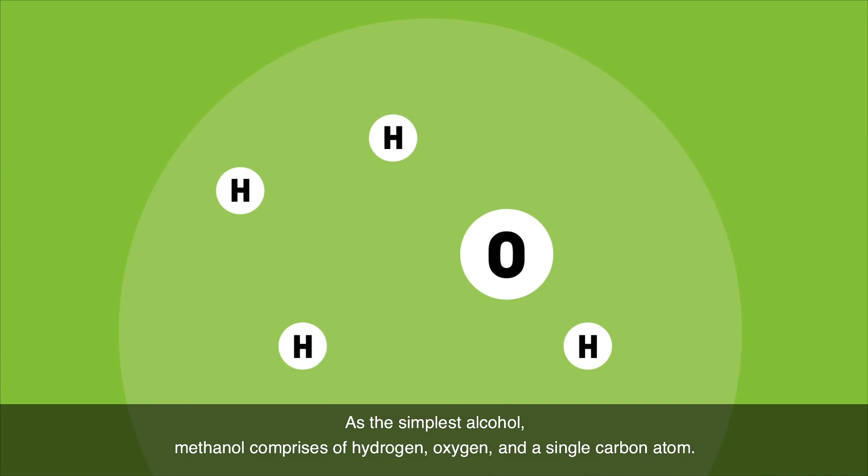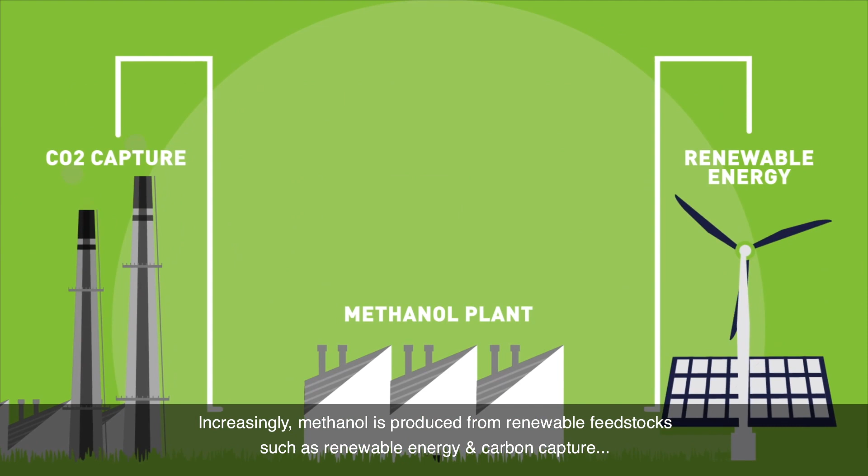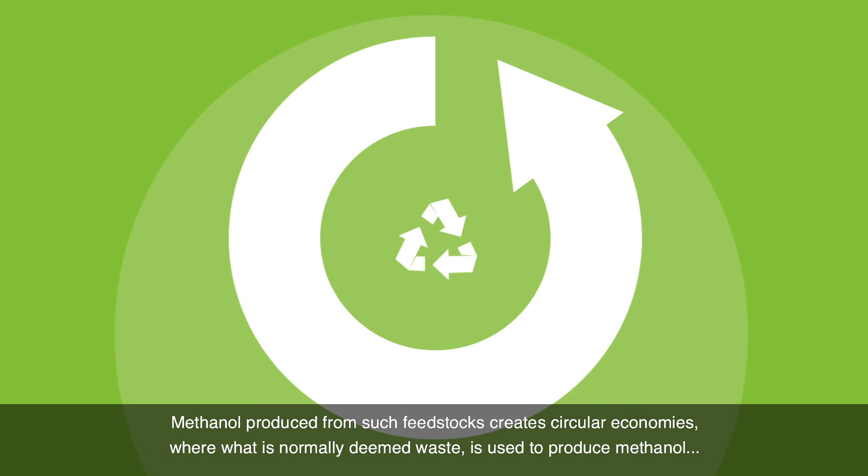In a fast-changing world, it is time to find innovative and efficient solutions to provide future-proof fuels. As the simplest alcohol, methanol comprises hydrogen, oxygen, and a single carbon atom. It has the highest hydrogen to carbon ratio of any liquid fuel. These chemical properties contribute to methanol's sustainability as a petrochemical feedstock and fuel. Methanol is commonly produced from natural gas. Increasingly, methanol is produced from renewable feedstocks such as renewable energy and carbon capture, municipal waste, and agricultural waste. Methanol produced from such feedstocks creates circular economies, where what is normally deemed waste is used to produce methanol, which is a useful and higher value product.

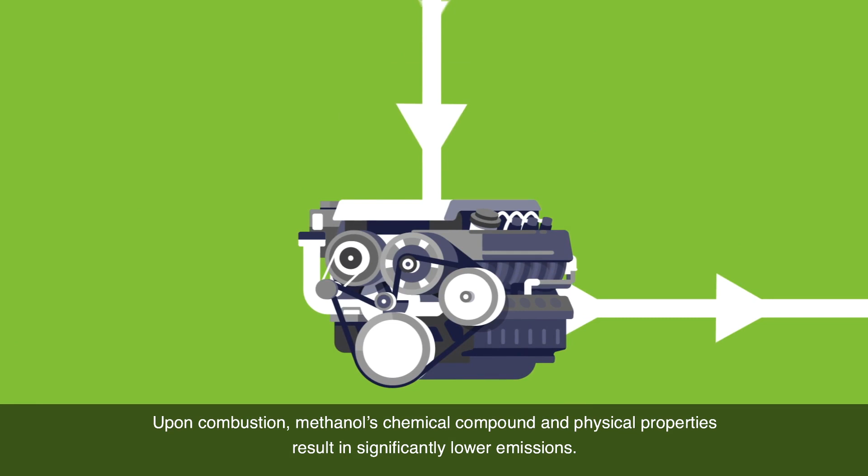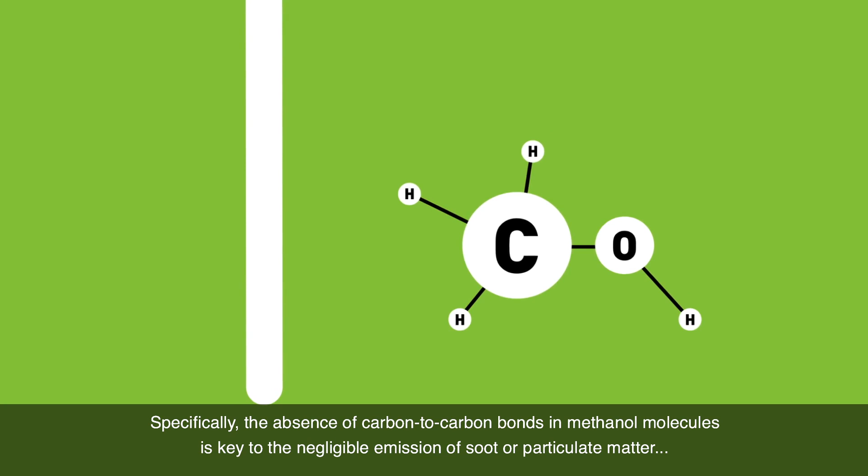Such processes effectively promote sustainability by creating value from waste and diversifying how waste is managed. Methanol is used to produce a wide range of ubiquitous products, such as materials for constructing houses, paints, plastics, car parts, and medical equipment such as personal protective equipment. When produced from renewable feedstocks, renewable methanol becomes a sustainable, net carbon neutral fuel, compliant with climate goals. Upon combustion, methanol's chemical compound and physical properties result in significantly lower emissions. Specifically, the absence of carbon-to-carbon bonds in methanol molecules is key to the negligible emission of soot or particulate matter, and the oxygen atom contributes to a fuller and cleaner combustion, making methanol an environment-friendly fuel that contributes to better air quality.

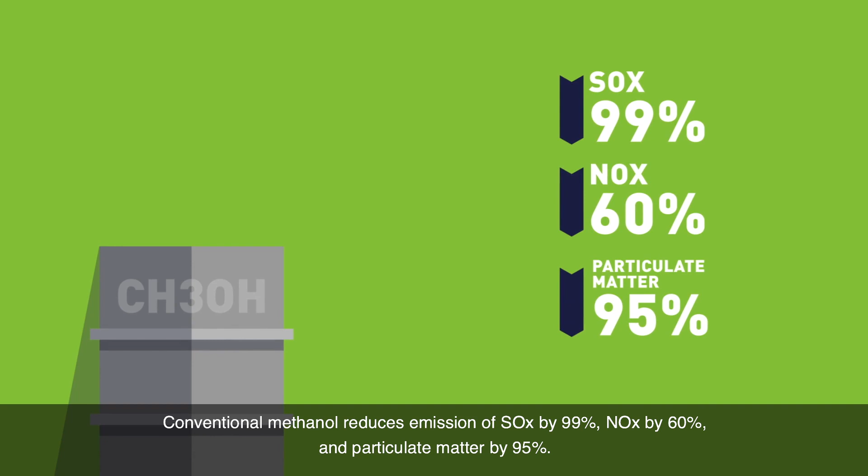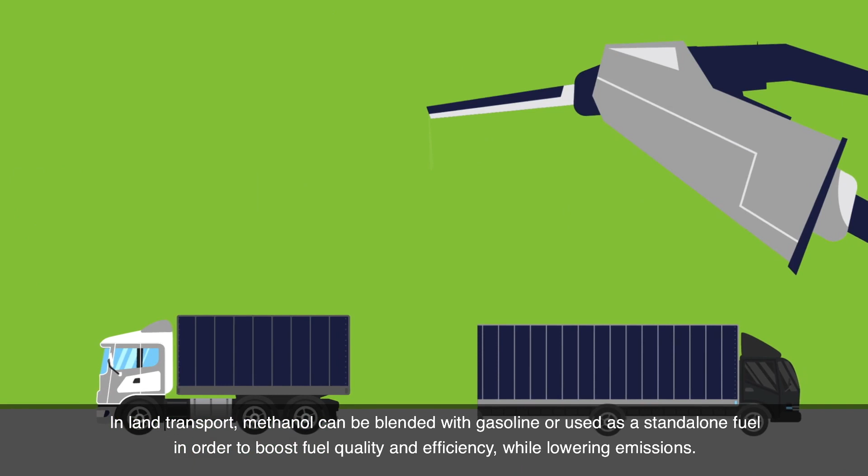As one of the most widely traded commodities in the world, methanol is available at more than 100 ports around the world, reducing infrastructure costs for the marine industry to transition to methanol. Conventional methanol reduces emission of sulfur oxides by 99%, nitrogen oxides by 60%, and particulate matter by 95%. Net carbon neutral renewable methanol will meet the International Maritime Organization's goal of reducing greenhouse gas emissions by 50% by 2050. In land transport, methanol can be blended with gasoline or used as a standalone fuel to boost fuel quality and efficiency while lowering emissions.

To improve air quality with a cost-efficient solution, China is fueling land transport vehicles with pure methanol. Iceland is fueling a fleet of cars with renewable methanol. Italy is blending A20, a blend of methanol, ethanol and gasoline. This blend is being demonstrated in a car-sharing fleet with plans for it to be made available to consumers. The United States uses methanol regularly in motorsports. Certain regions in China, India, Nigeria and Tanzania have adopted methanol as an alternative fuel for cook stoves. Methanol's clean burning properties improve indoor air quality, lowering the risk of respiratory diseases.

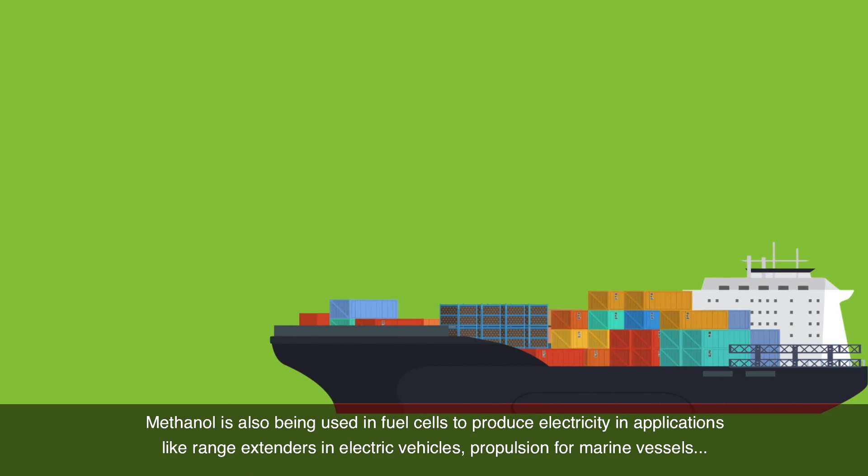Methanol is also being used in fuel cells to produce electricity in applications like range extenders in electric vehicles, propulsion for marine vessels, unmanned aerial vehicles, telecommunication towers, and military equipment. As a liquid at room temperature and pressure, methanol is a convenient hydrogen carrier for fuel cells.

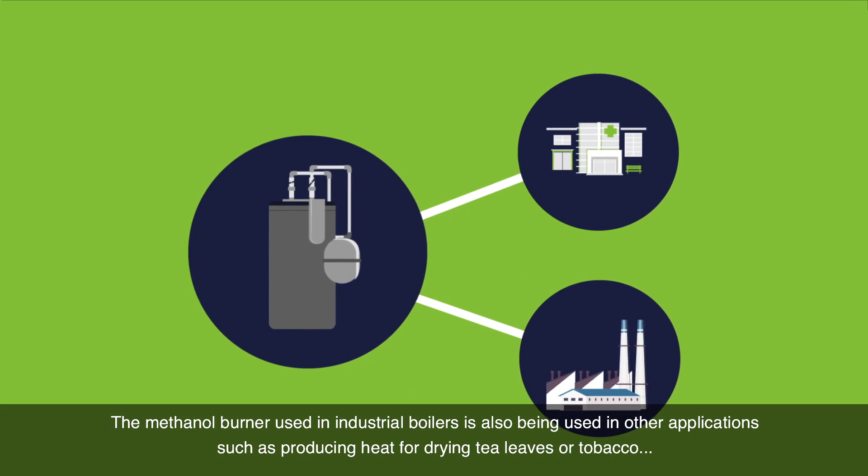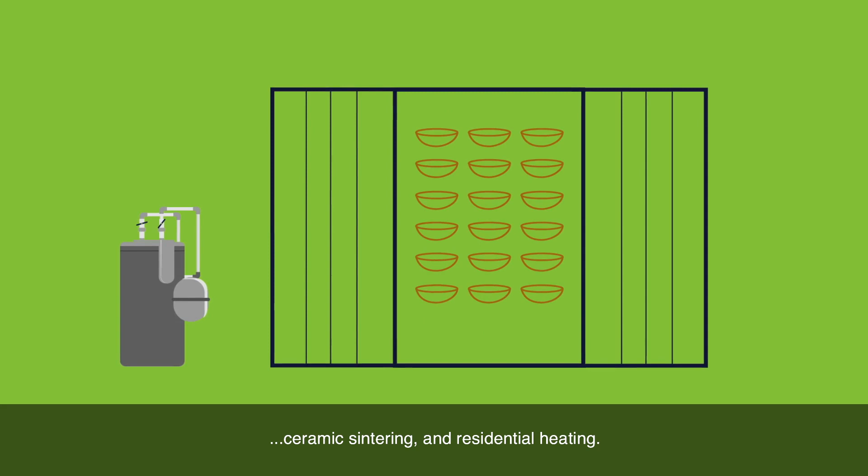Increasingly, methanol is being used as a fuel in industrial boilers to produce heat or steam for the pharmaceutical and manufacturing industries. The methanol burner used in industrial boilers is also being used in other applications, such as producing heat for drying tea leaves or tobacco, ceramic sintering, and residential heating.

As you can see, there are no shortages of available applications for methanol as a clean and net carbon-neutral fuel. Methanol is the key to a more energy-efficient and clean future.

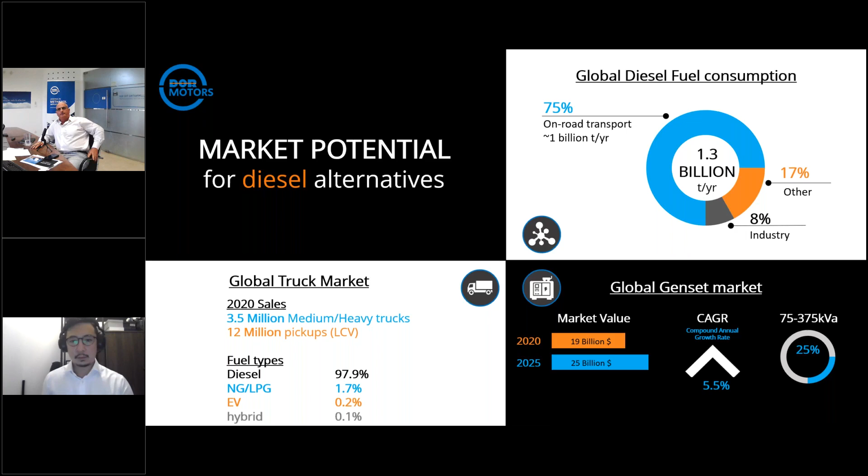And still, as far as methanol, we do have to realize that there are some challenges to look into in order to make methanol an acceptable fuel. One of which has to do with the machinery, with the engine, and the other aspect is the chemistry. We call it DOR-Mix. This is to say both the additives that we have to add to the methanol, as well as additives we have to add to the engine, like the special lubricants. And these I will now talk about.

So let's start with the generators. As I mentioned, it's a $20 billion market. And what we've done is we've been able to manufacture generators of both medium and small size, as well as large size generators that replace 100% diesel with 100% methanol. First and foremost, the emissions have been significantly reduced. As we all know, methanol, when it is burned, and especially when it is burned at the right properties, there are no particles, and this is very significant, a significant reduction in NOx, SOx, as well as CO2.

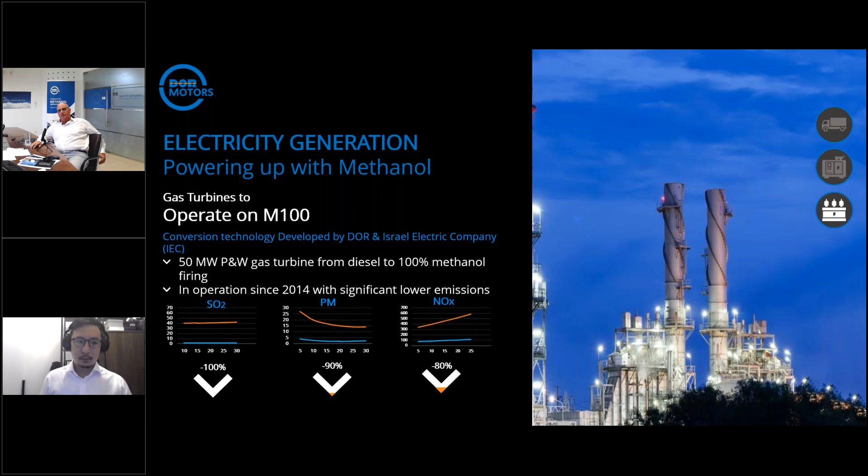We don't need the SCR system in order to comply with Euro 6. The SCR is what we normally use, the urea solution, which is added to trucks in order to reduce emissions. When running on methanol, it is not necessary, and yet we comply with the Euro 6 emissions standard without the SCR, which is very costly, both when buying and when running. So it's really a significant improvement.

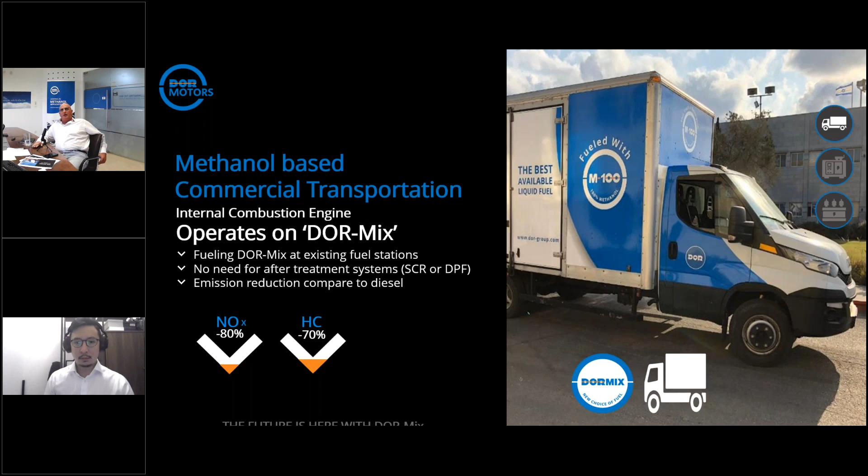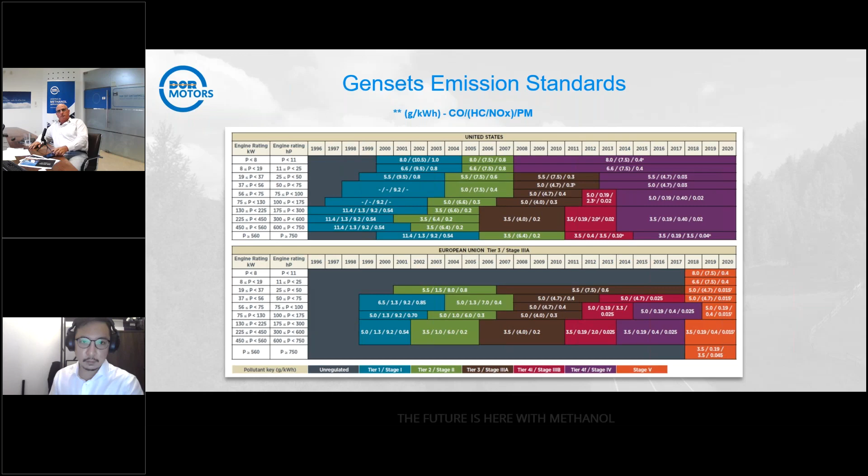So to sum up, these are the overall reductions in emissions for methanol as compared to diesel. When adding some of the additives, we can get even improved reductions of emissions. But again, the most significant point is that this is done at a relatively very low cost using existing infrastructure, whether it's internal combustion engine, a gas turbine, as well as the storage and distribution infrastructure.

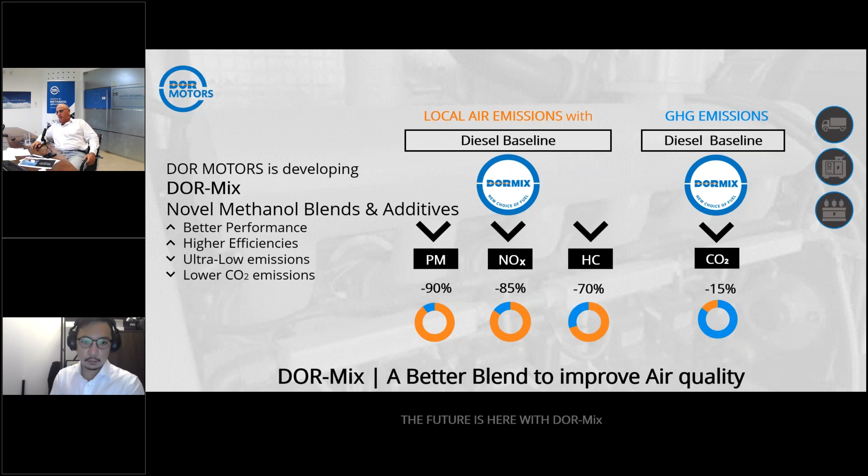So what are the challenges we are facing? We do need to do some modifications to the internal combustion engine. There is the issue of material compatibility throughout the chain. Methanol does have its own properties, and we do need to understand the chemistry in order to overcome corrosion and wear.

There are issues of health and safety. I mean, when methanol is burned, it burns almost in a way that you cannot see it. So there are precaution issues that we have to take care of. And obviously, we have to provide the methanol supply chain and make sure that it's there. Otherwise, no one will be interested in using it.

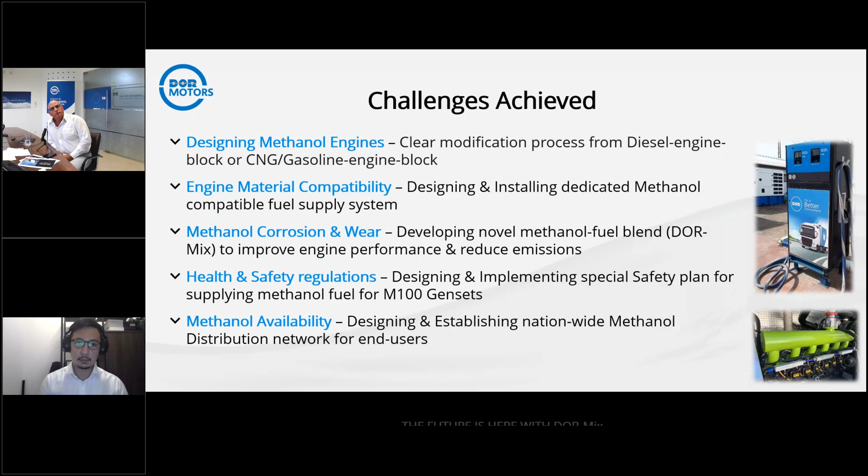I would like to take just a few slides to mention the work we've done with Fiat Chrysler as far as fuel blending, 15% methanol in gasoline, where actually here the major advantage was that there wasn't any significant change we had to make in the overall sedan in order to utilize M15.

And here you can see the emission difference, reduction of emission as compared to RON 95 gasoline. And you can see a very significant reduction in emissions when blending 15% methanol into gasoline. And again, at the end of the day, we achieve this with no additional cost to consumers.

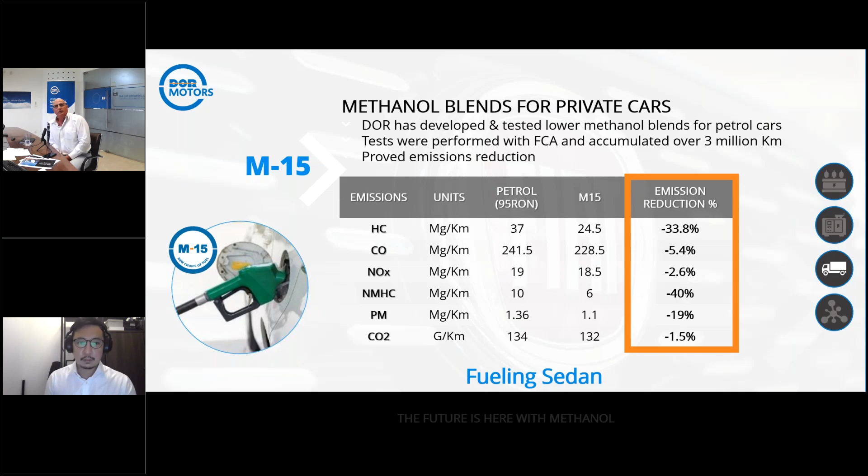So what is our market potential? First of all, for generators, the electric vehicle revolution will require much more electricity, and we do get a lot of demand for gensets running on methanol in order to charge electric vehicles, especially buses in the cities. So this is a new application, and we are welcoming it.

I would say that altogether, the main advantage for methanol will be in those markets where methanol is being produced. That's where the delta between marketing the methanol locally for energy is much more beneficial as compared to exporting it, as well as all those markets which practically in one way or another are placing duties or levies on diesel, and this makes diesel more and more expensive, which implies that methanol will become much more competitive, whether it's methanol produced from natural gas or methanol that is and will be produced from alternative fuels and will become part of the overall idea and notion of recycling our energy and our resources.

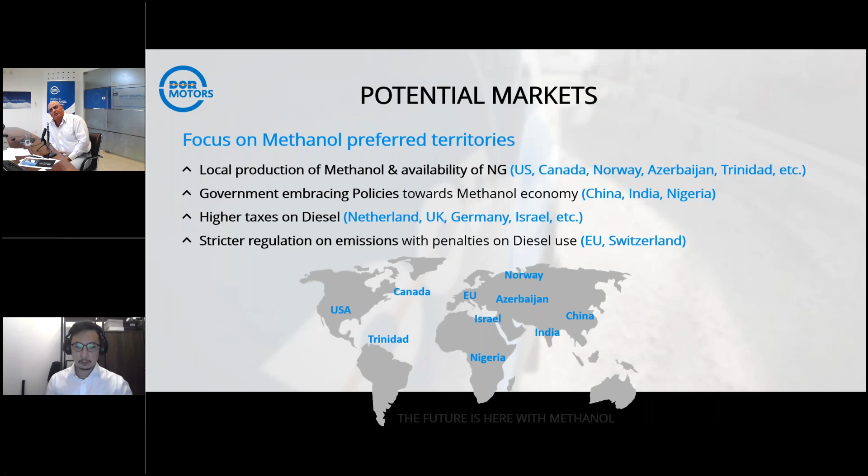So I thank you very much for the opportunity, and I invite you to become part of this exciting revolution. Thank you.

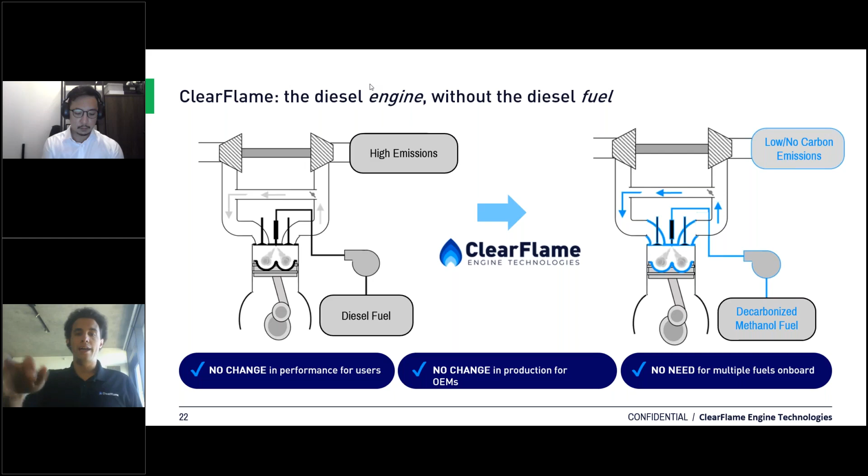We have run both ethanol and methanol in the past, by the way. We've been able to demonstrate that we can hit all of those operating points without the need for any diesel fuel, using the stock methanol that is already out there and available, whether it's mixed with gasoline, mixed with water, or any other potential impurities. We've proven the technology on the Cummins engine platform, and we are putting it into trucks on the road in the fourth quarter of this year.

So what this technology enables in terms of its value proposition pillars are really three core attributes critical for cost effectively mitigating emissions from the heavy duty sector. First and foremost, this has to be a low cost solution. Total cost of ownership has to pencil, which means you can't require a lot of upfront capital, either on the equipment or the infrastructure, and you can't increase operating costs with higher fuel costs.

Similarly, we need solutions that are fast to implement. There's a lot of work being done on solutions that might be relevant in the 2040 to 2050 timeframe. But if we're serious about hitting our emissions goals, we need alternatives that are ready to go now. And to be clear, this can be compliant with any emissions reduction norm, as Gil was just mentioning, Euro 6 transitioning into Euro 7, what's happening here in the United States or in California at CARB, and at the international level in terms of carbon mitigation regulations.

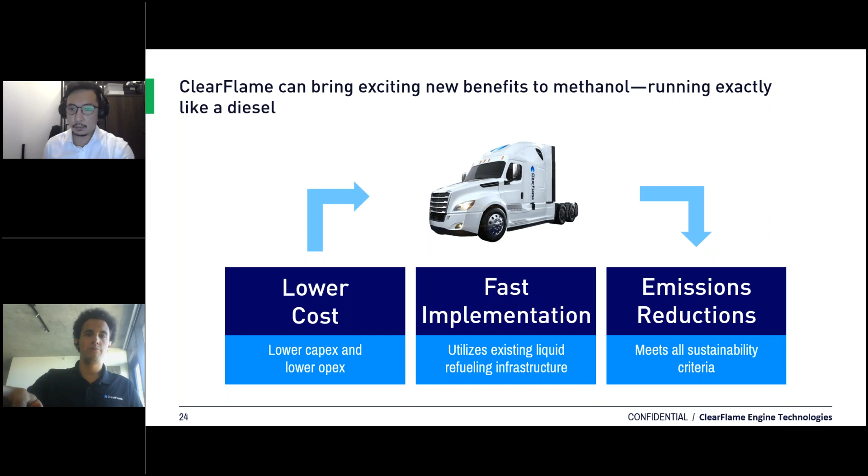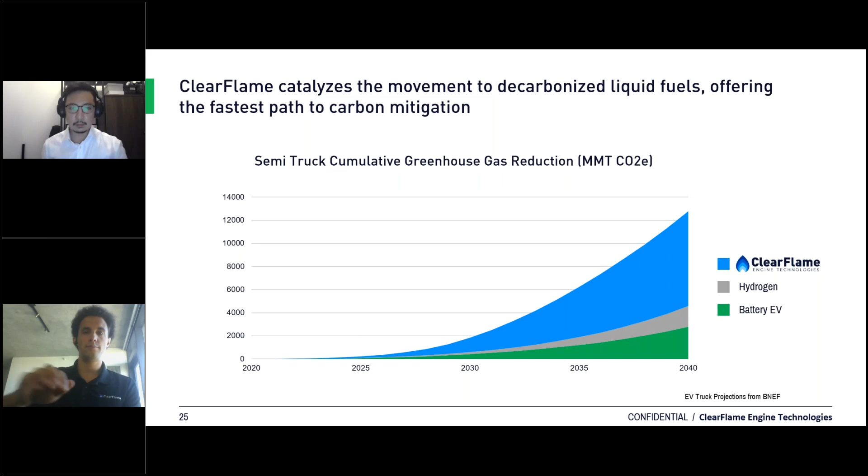And circling back to the economic case, again, while we are focused on emissions reduction and sustainability, solutions do not get adopted in these commercial sectors, the ones that are most reliant on diesel engines, unless they save operators money. Margins are very thin and people simply cannot pay extra to go green. This is really one of ClearFlame's biggest advantages. By not adding any complexity to the truck itself, while also using low cost and readily available fuels, we can offer a lower total cost of ownership, meaning there is no longer a green premium to reduce the emissions of your operation.

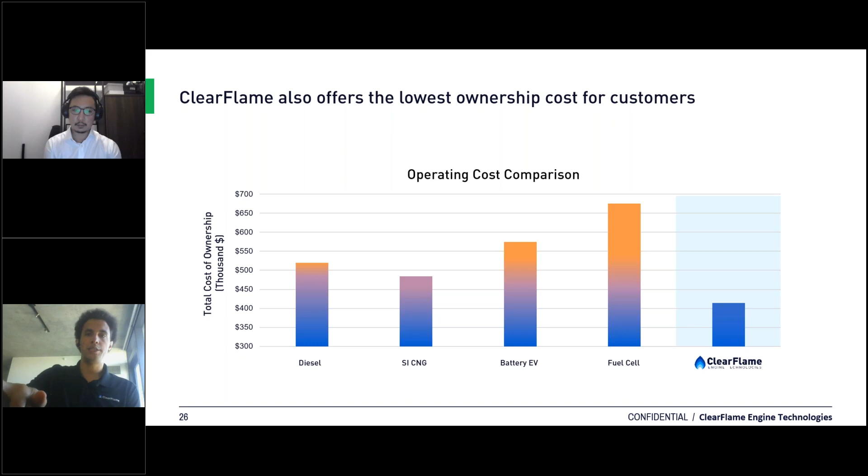This, of course, is critical for accelerating adoption of drivetrains in cities that can improve air quality. So a lot of the focus in the world today and in the presentation so far has been on carbon, but knowing that we can improve soot, SOx, NOx, and all the other human health concerns associated with diesel is a major benefit that can't be overlooked.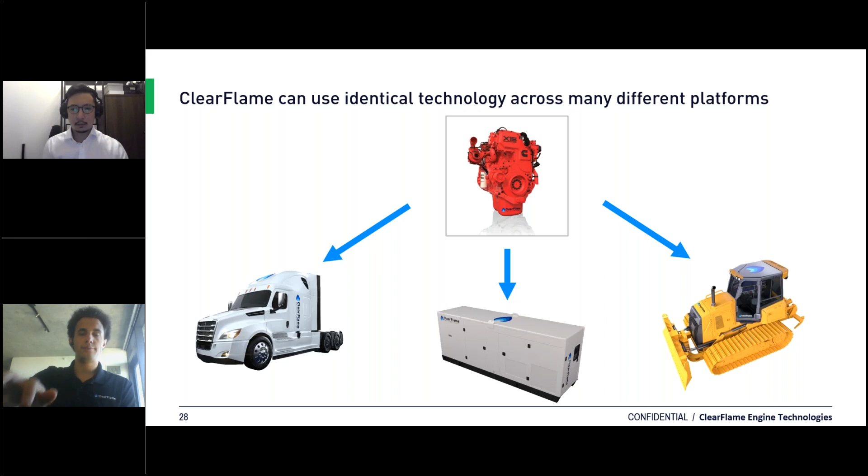Now, I've talked about this technology mostly in the context of trucks, but I do want to indicate that this is capable of being used anywhere a diesel engine is used today, which includes not just trucks, but off-road equipment like construction and agriculture, and solutions like diesel generators. This, of course, is a massive market opportunity, both in terms of the commercial revenue that we can get from product sales, but also major new markets for fuels like methanol, as they all seek to displace diesel fuel in parallel.

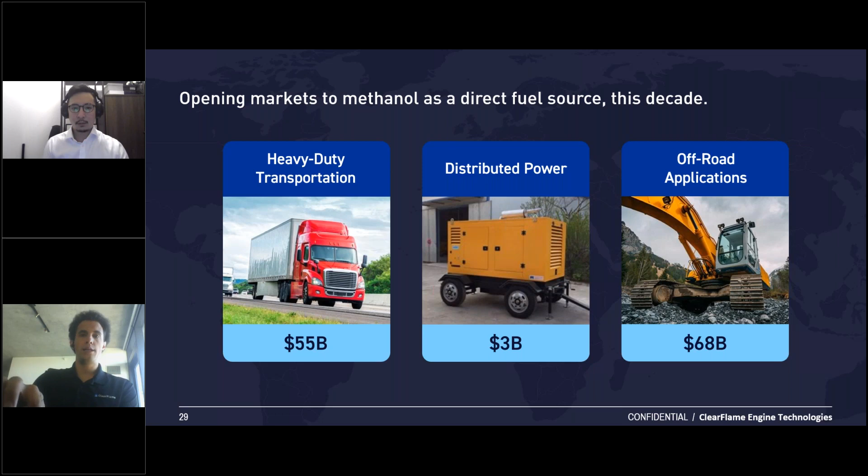So, with the kind of concluding remarks today, I want to share a few thoughts of how I think ClearFlame has a chance to collaborate with the methanol ecosystem going forward. As I mentioned, we're going to be putting our first 2 trucks on the road in Q4 of this year, and we have partners lined up here in the United States to test those trucks, in this case using ethanol fuel, because in the United States, that's where we've lined up our fuel partners. We would love to be able to expand this into international opportunities or domestic opportunities where using methanol might be the preferred alternative to ethanol.

These trucks are ready to go. We just need the fuel partner and the fleet that's ready to test them on another fuel besides just the ethanol alcohol.

Also, we have a demonstration planned in 2022 in a microgrid. One of the things that has been of great interest here in the United States of late is grid resiliency. What happens as we get lots of wind and lots of solar, and there becomes fluctuation in the electrical supply that's available on the grid? Well, historically, those demand fluctuations have been met by things like diesel generators or natural gas peaker plants. Using a technology like ClearFlame's, you can operate at very high efficiency and provide on-demand power, but without the emissions and cost challenges of diesel fuel by using that lower cost alcohol. Again, this is currently a US demonstration planned with ethanol, but we would love to get a parallel demonstration on methanol going as well.

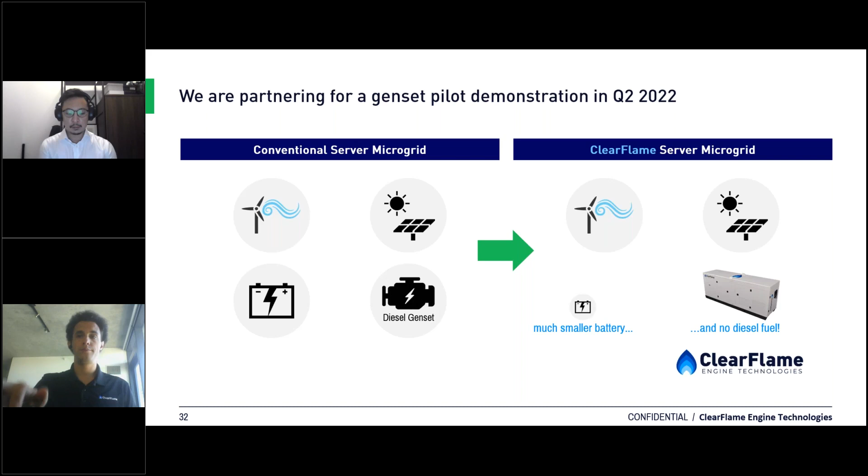I should point out this isn't just about new engines and equipment. There are millions of diesel engines on the road and in fields that will persist for decades. A fundamentally retrofittable solution like ClearFlame's is important, not just to slow the expansion of diesel going forward, but to address those existing assets that will remain big polluters unless we find a retrofit alternative.

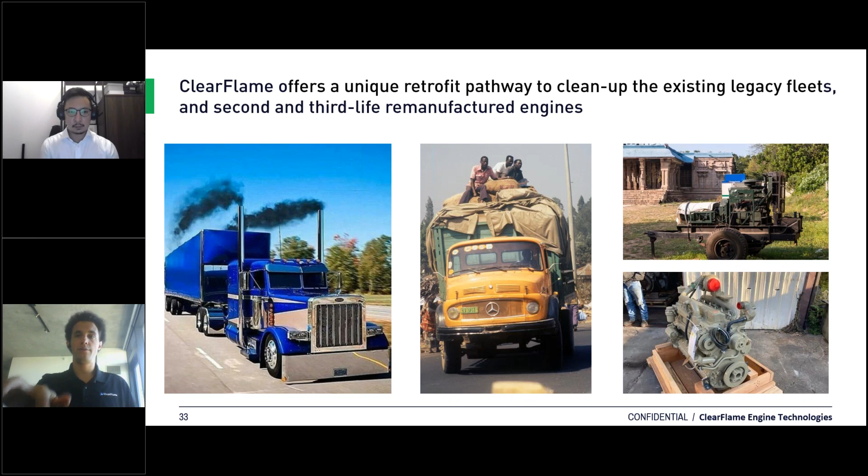My final point on methanol infrastructure today is some messaging that can help in the United States and Europe as well, which is the potential for methanol to be a hydrogen carrier and expand energy access. Right now there's need for hydrogen infrastructure, but no demand for hydrogen fuel because we don't have fuel cell vehicles yet.

We can build methanol stations today that are low cost using liquids, and those stations are viable because they can deploy fuel right away into technologies like Dor's and ClearFlame's. But at the same time, that distributed methanol can be reformed to hydrogen, meaning in the future we can have dual fuel stations providing both hydrogen and methanol to the market.

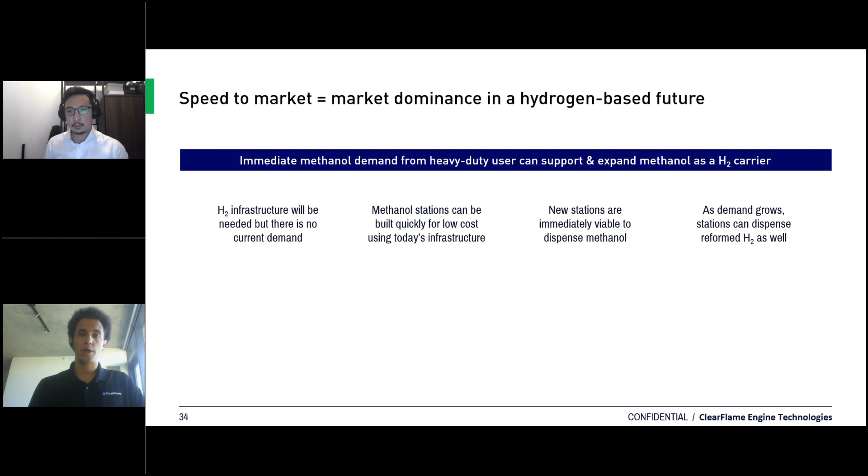This isn't to say hydrogen or methanol, one is better than the other, but I think the more we can show these solutions working together in a way that can have immediate impact, that's a great way to get the policy support we need to expand into the market.

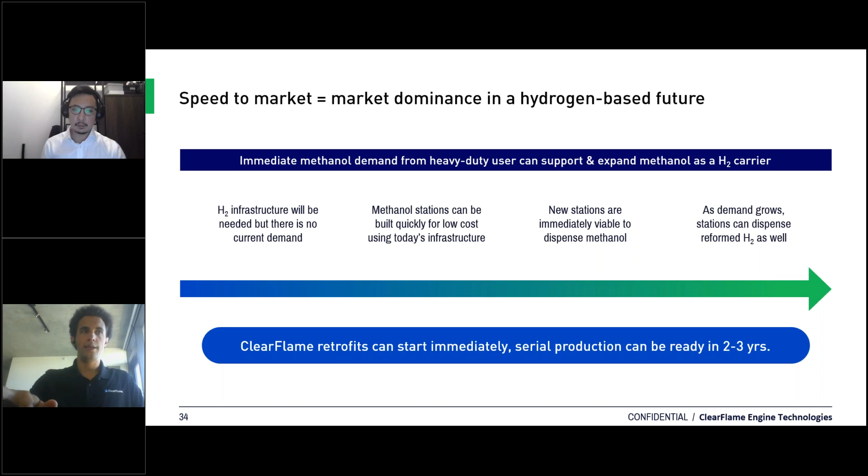Wrapping up, at ClearFlame our vision is to provide an easy to adopt, fast to market solution that can enable rapid carbon mitigation without sacrificing any heavy duty performance. And we can do that without a lot of infrastructure development, without decarbonization of our electrical grid, and perhaps most importantly, not requiring users to change the way they're getting their jobs done today.

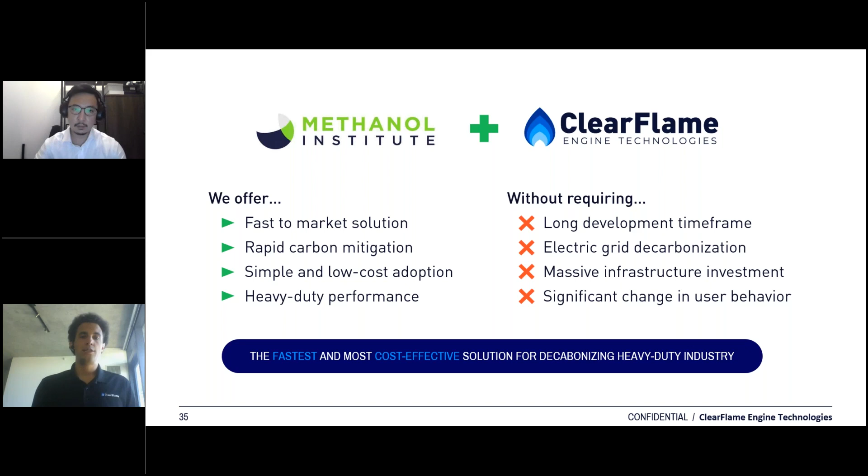So thank you very much for your time. I look forward to taking any questions at the end of the presentation and exploring how ClearFlame can work with the methanol sector to prove there's a faster and more cost-effective way to decarbonize heavy-duty industry.

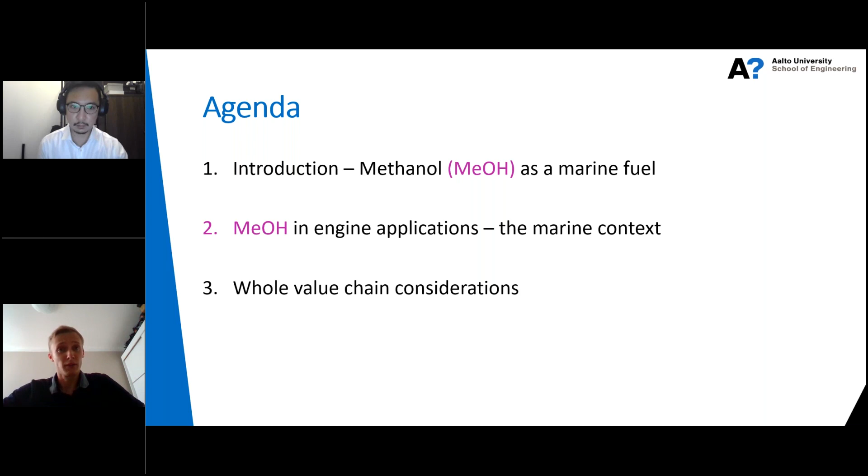I will focus on this end-use application, but also give you some highlights regarding our other activities related to the whole value chain considerations of methanol. The former speakers just introduced methanol pretty well and highlighted the benefits, so I think it's clear that methanol is a very promising option.

But I would like to start with this figure where we have a pyramid representing the challenge of decarbonization of transport. If we go to the bottom of this pyramid, we see that readiness of electrification is pretty high, especially for light-duty vehicles or rail. But if we go to the higher levels, other sectors, we highly need liquid or liquefied fuels.

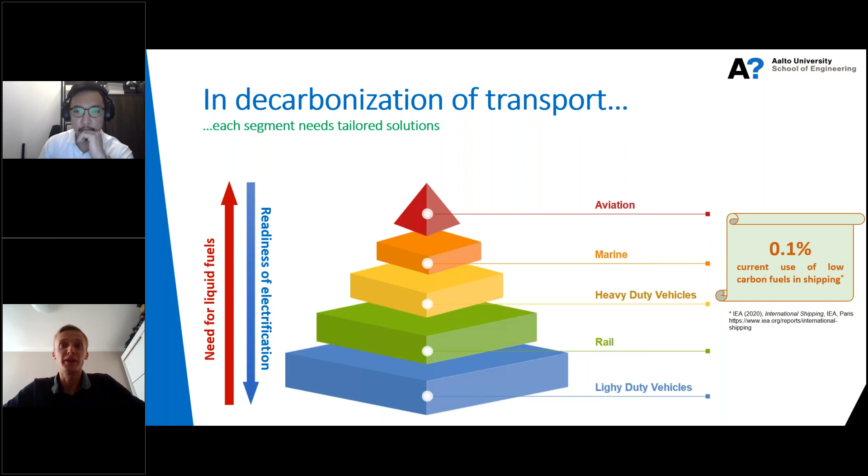Focusing on the marine sector, at the moment there is huge room for activities in decarbonization. Currently we have only 0.1% of low carbon fuels, so that's a very big room for greening solutions.

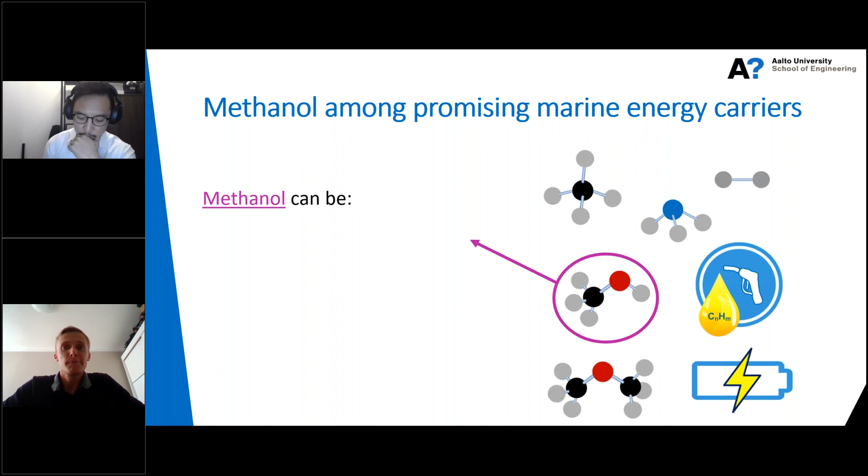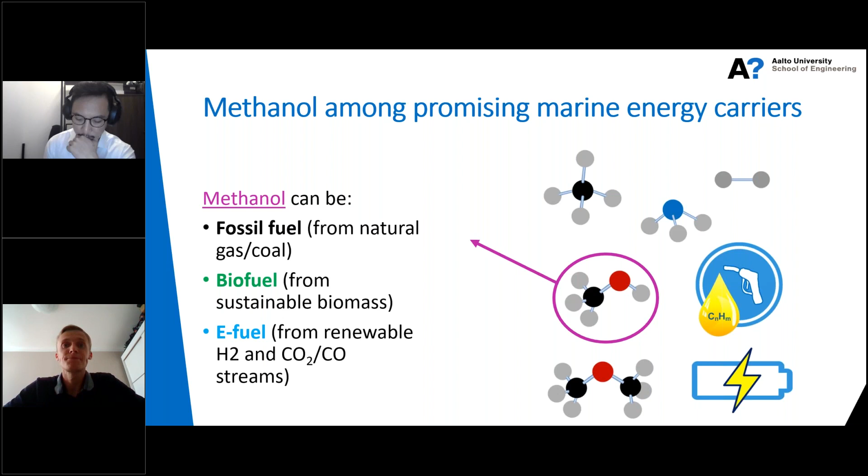For shipping, we have a few options, like liquid biofuels, then electrofuels, then maybe some forms of hybridization. But from this perspective, we picked methanol as one of the most promising options for marine transport. Of course, methanol at the moment can be fossil-based—almost all production comes from natural gas or coal. But in the future, we could expect growing importance of biofuels and electrofuels, so in that way we can also produce methanol. That's the huge merit of methanol.

Here I listed the most important advantages of methanol. Of course, the liquid state at ambient conditions is important from a storage perspective for shipping, and we have already partly ready infrastructure in big harbors. Apart from that, methanol is miscible with water and biodegradable, and far less toxic than heavy fuel oil, for instance.

Of course, as with all new technologies, we have some challenges to be properly addressed. One is related to the energy density of methanol, but it can be overcome, for example with bigger onboard tanks, maybe some additional safety measures on board, and of course cost. That should be properly addressed in the future.

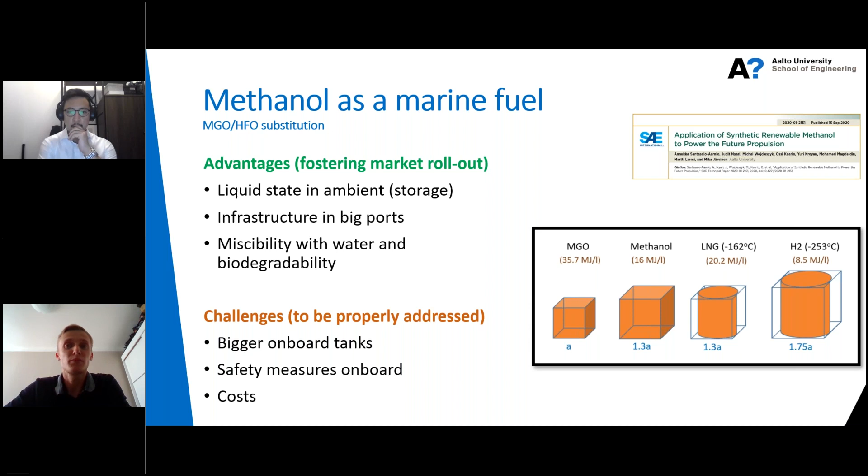Now let me move to the core part of this presentation, methanol combustion in compression ignition engines. For shipping purposes, due to the very high efficiency of compression ignition engines, we can try to use methanol in two different concepts. One is direct injection of methanol.

Here we can have ignition improvers blended with methanol, or direct injection of methanol and then pilot diesel injection. The second concept is port fuel injection, where we have conventional dual fuel combustion or reactivity controlled compression ignition combustion.

How are those concepts represented in the market? There are already some commercially proven technologies. In the marine sector, we could see, for example, the Wärtsilä direct injection system in a 4-stroke medium-speed engine, successfully demonstrated. Then we have 2-stroke low-speed engines from MAN, also with direct injection. And for the port fuel injection concept, we have diesel direct injection combined with port fuel injection of methanol.

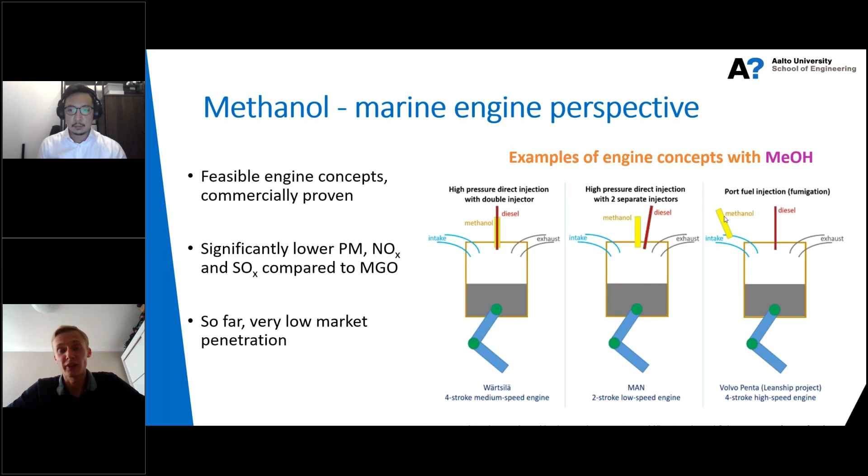And how can we, as a research institution, support these activities? We are trying to lead experiments and understand the physics inside the combustion chamber.

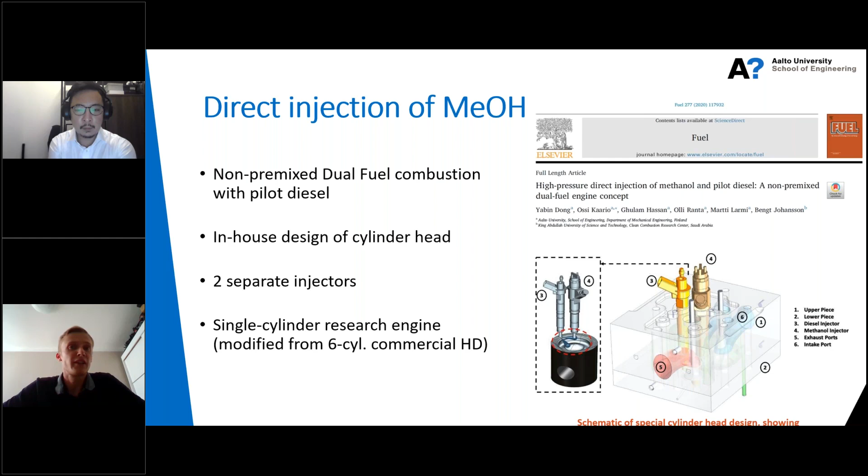Here is one example we tried with direct injection, the first concept I introduced: direct injection of methanol with non-premixed dual fuel combustion. What's interesting is that in our group we designed our own cylinder head with two separate injectors, using a modified single-cylinder research engine in our lab.

The key results from this experiment: we reached 44% thermal efficiency. It turned out that methanol, as a main fuel at high loads, can lead to stable combustion and robust ignition characteristics, increased thermal efficiency, and lower local emissions like unburned hydrocarbons and carbon monoxide. Those results are already available, so you could check the references.

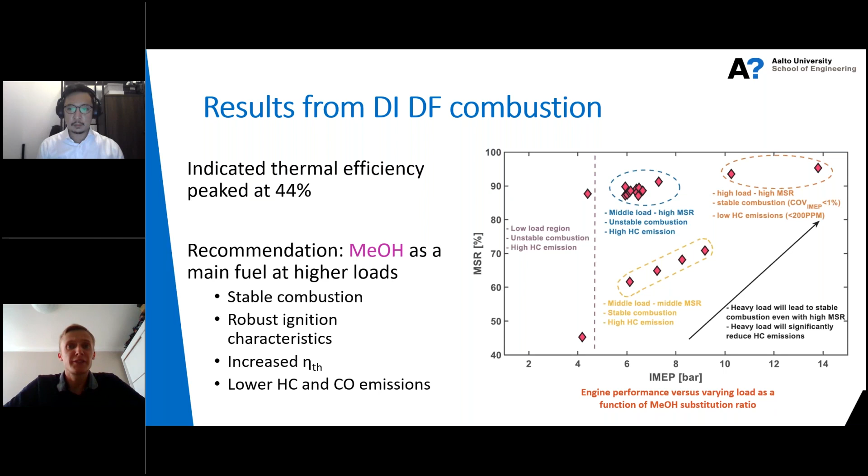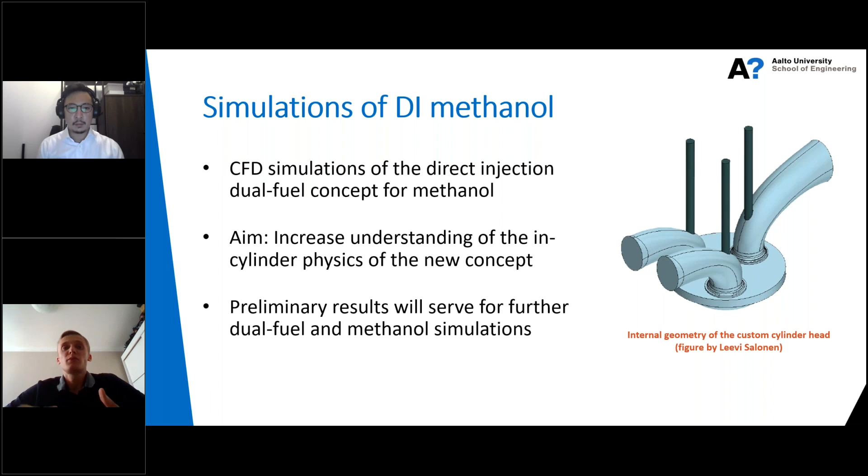Currently, these experiments are followed by simulations. We are trying to understand the physics inside the cylinder for this new concept, and the results we are obtaining will serve for further dual fuel and methanol simulations.

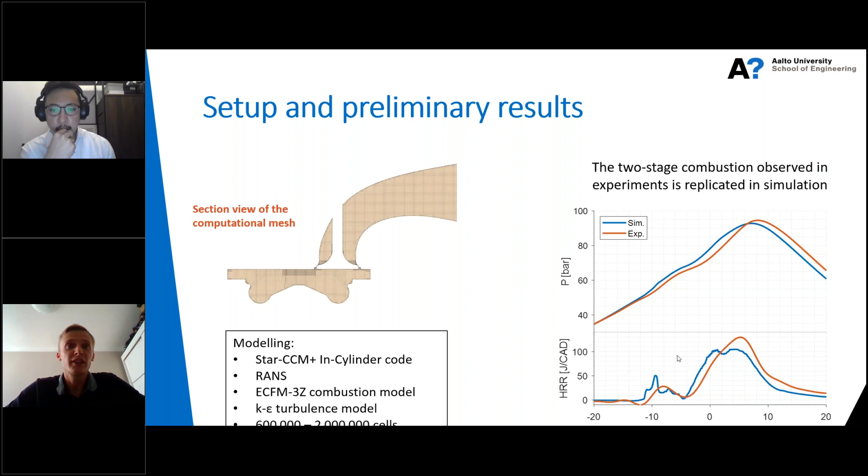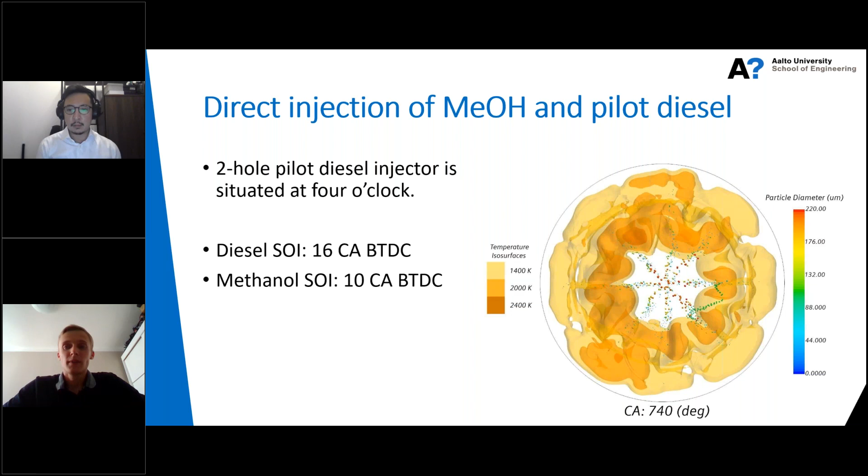So the previous slides were related to direct injection. Now I will say a few words about methanol port fuel injection. It's a more conventional dual fuel concept, but we have done one innovation here with negative valve overlap.

Some portion of the exhaust gases are trapped inside the cylinder, functioning as internal EGR, or internal exhaust gas recirculation. The results are not published yet but are very promising. We obtained pretty stable combustion with quite high thermal efficiency and pretty low emissions, with very high methanol substitution, meaning how much diesel is substituted by methanol.

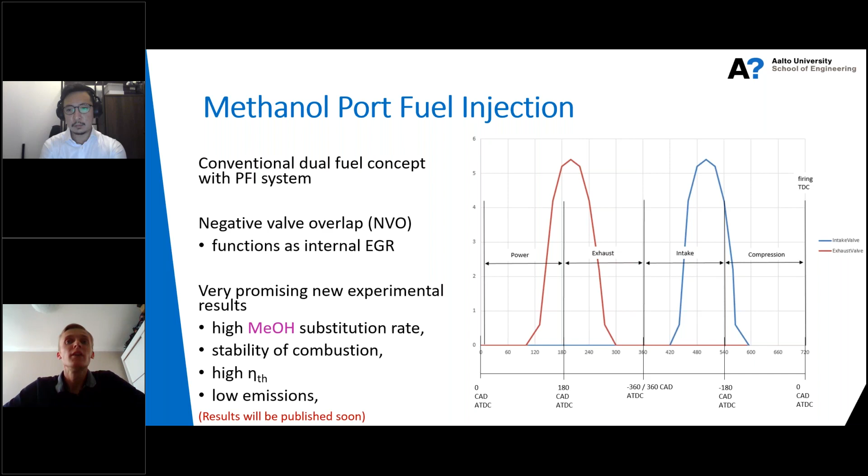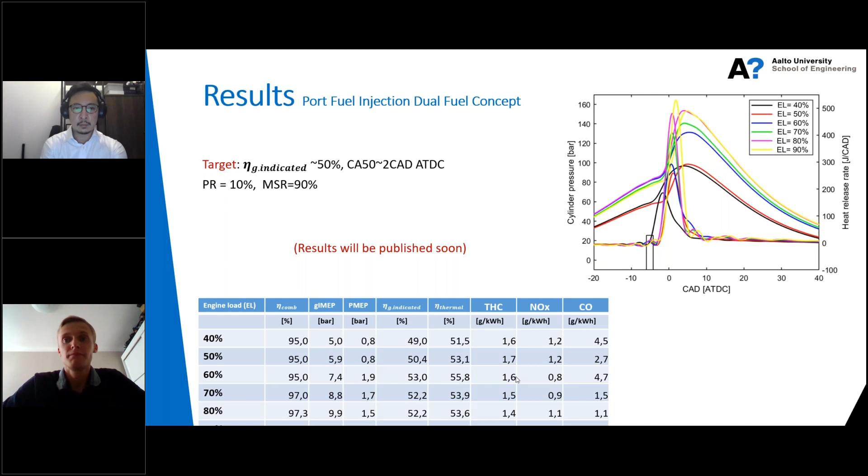Now a few words about more fundamental studies. As you might know, the spray is a very critical parameter for compression ignition engines, affecting engine efficiency. We were also studying, two years ago, how methanol spray behaves in the combustion chamber.

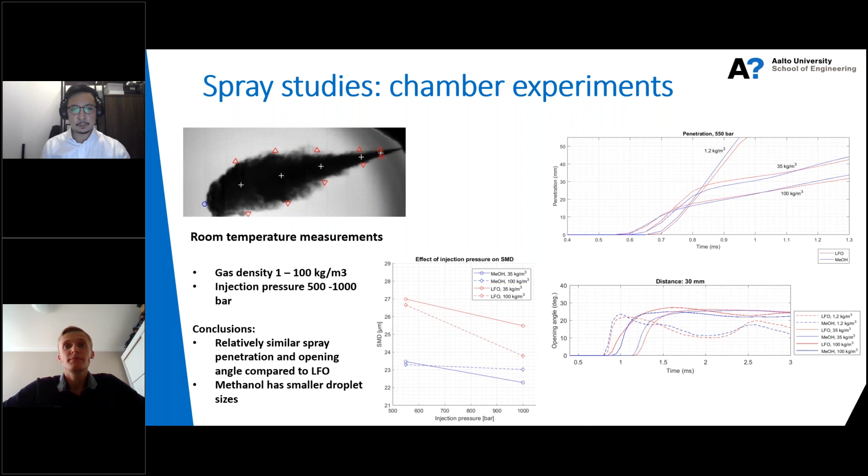Those experimental studies were accompanied by simulations, including large eddy simulations to understand the fuel spray mixing and evaporation. Those simulations were pretty in line with experiments, so there were no big differences between light fuel oil and methanol fuel. But of course, the lower temperature within the spray was caused by the higher heat of vaporization for methanol.

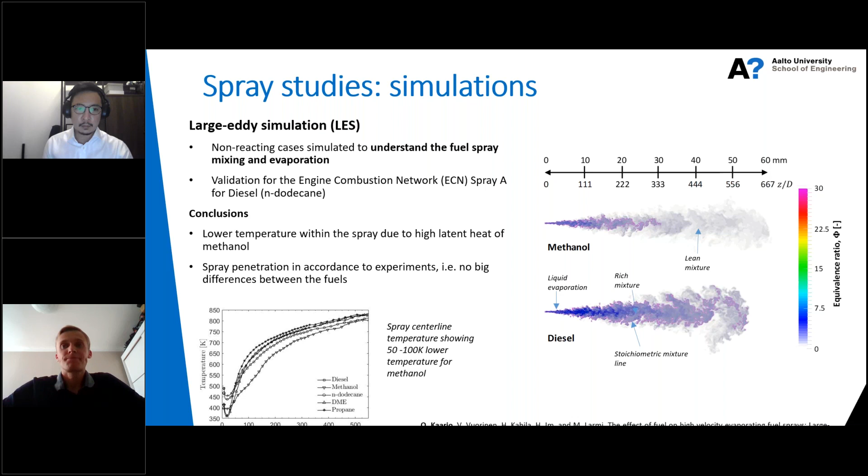At the end of my presentation, I'd like to give you some highlights regarding the whole value chain assessment. In our research group of energy conversion, headed by Professor Martti Larmi, we covered the whole value chain related to energy carriers, starting from conversion, then energy use and recovery. One important aspect when we speak about methanol as diesel substitution is where we will have our renewable methanol from.

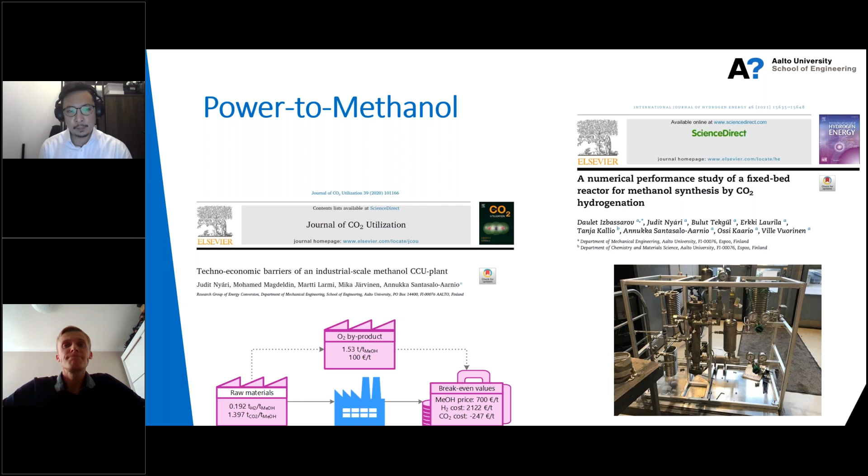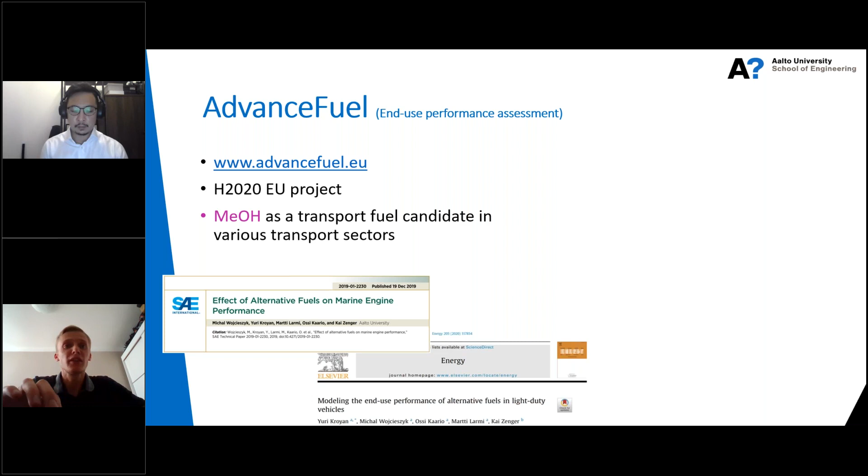Then going to the end-use performance assessment, we contributed to the Horizon project funded by the EU Commission. You can find more information on the website. Methanol was identified as one of the most promising transport fuel candidates. And in the AdvanceFuel project, we created a tool which can assess different fuel options from the end-use perspective, including methanol.

Finally, as we have both production and end use, we also need legislation in place and an appropriate environment to support the market uptake of methanol. In the AdvanceFuel project, we have good collaboration with other partners related to all value chain parts, where we identified the most significant policy gaps and what interventions are needed. Upcoming work will identify methanol as a key fuel for hard-to-abate sectors, especially maritime.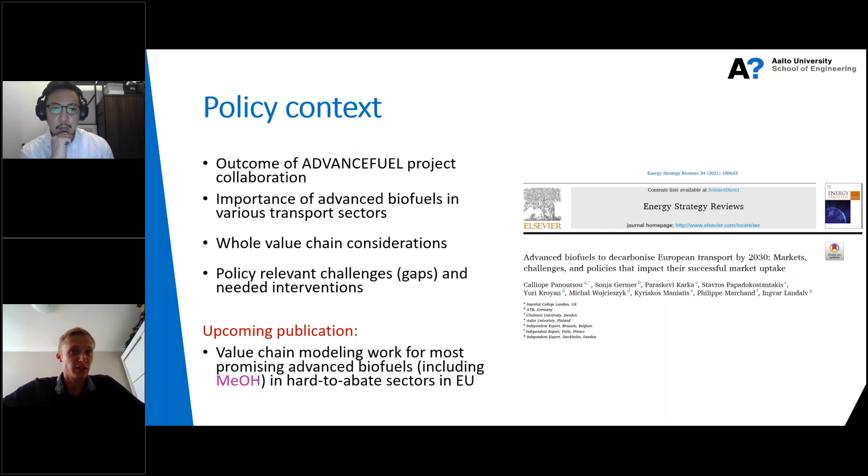At the end, I would like to acknowledge the support and contribution to this presentation from my colleagues, Professor Martti Larmi, Ossi Kaario, Zeeshan Ahmad, and Leevi Salonen, and the whole research group of energy conversion.

So with that, I would like to conclude and thank you for this opportunity.

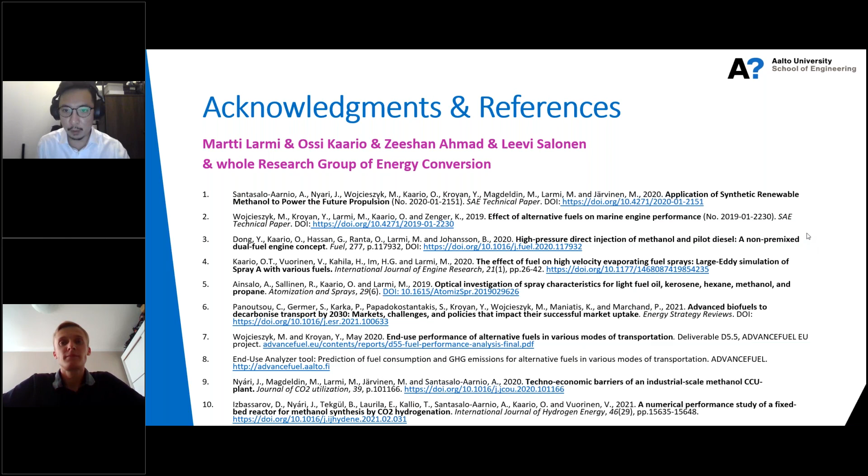Jan, let me see if I can pass controls to you. And you can start when you're ready.

Hi, hello everybody. My name is Jan from FuelSafe. I'm today replacing Mark, our COO, sorry, I'm the COO. As we had very interesting scientific input before, thanks for the many details and interesting aspects about methanol itself, I will keep concentrating on the aspects of our technology, what we are doing, what we are achieving in reality, and skip a little bit on the methanol benefits, because those have been clearly described before, even better than I could do.

FuelSafe is a German green technology startup, and we developed a hardware retrofit system to reduce emissions and operating costs on existing large engines. There's a gap between smaller engines like truck engines that can be more easily retrofitted to methanol standard. It's way more complex due to the methanol energy content to do this on ships, for example, or on larger power plants. So we developed a hardware retrofit that is already being installed today, actively helping today to make fossil fuel diesel engines cleaner and more efficient.

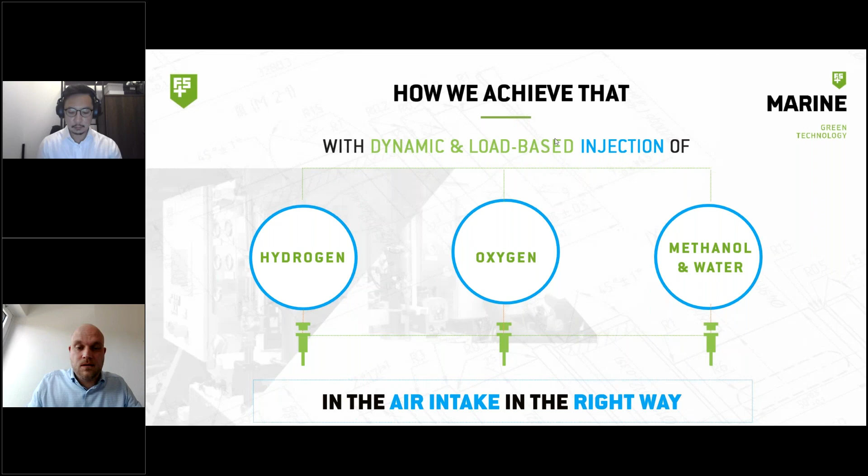So what we do, we use methanol not as a fuel replacement, but as an additive, meaning we inject about 3 to 5% of the original fuel volume as methanol into the air intake of the engine. We're injecting the methanol together with water and a separate hydrogen and oxygen gas mix, our so-called synth gas. We inject those 4 additives into the intake of the engine, and by that we achieve several very positive aspects.

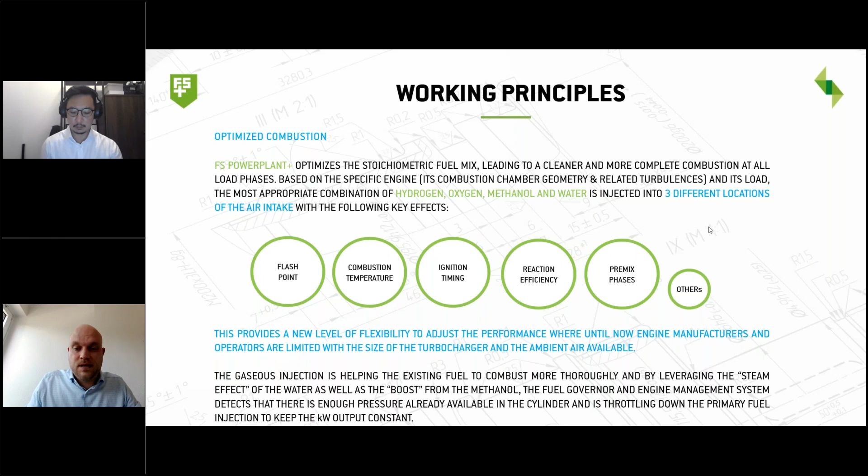Those have already been described technically by the presenters before. What we can influence with these mixtures is the flash point, combustion temperature, ignition timing, reaction efficiency, the premix phase, and other aspects. In total, we inject the right amounts of additives at the right time according to the engine load into the air intake, cooling down the intake temperature and helping the ignition process, especially in combustion, to become more comprehensive and efficient.

So I will skip those technical installation details.

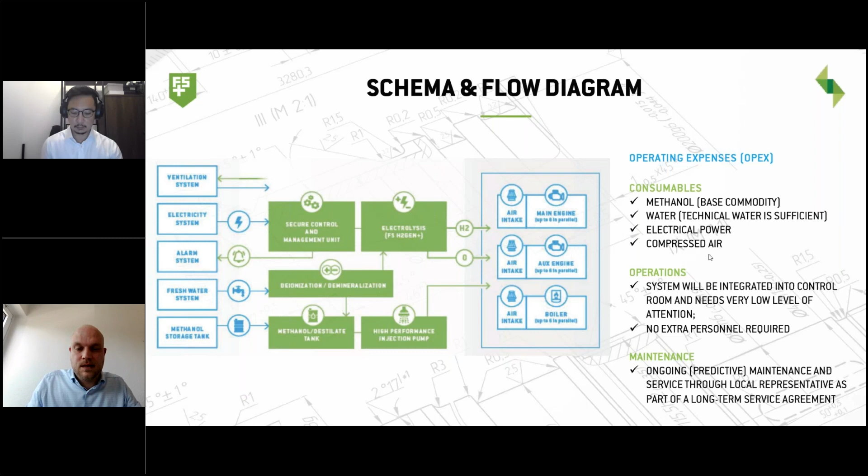What we achieve for our customer: in first installations with prototypes on smaller engines, we had up to 25% primary fuel reduction, meaning 25% of the primary fuel, in this case diesel, had been cut due to our injections. We have tremendous maintenance and cost reduction coming from the reduced engine wear and tear.

We clean even the engine from the inside. This happens due to the hydrogen, small steam explosions in the combustion process. We had clear lube oil prolongment in its use, and we can reduce carbon dioxide by up to 15%, due to the reduction of primary fuel, up to 40% in particulate mass reduction, and SOx reduction, also related to the primary fuel reduction.

We are very, very good at NOx reduction with the cooling effect and also the water that we utilize. We can achieve NOx reduction up to 80%. And resulting from this particulate mass reduction, we have up to 33% reduction of black smoke, black carbon, or what you call smoke usually.

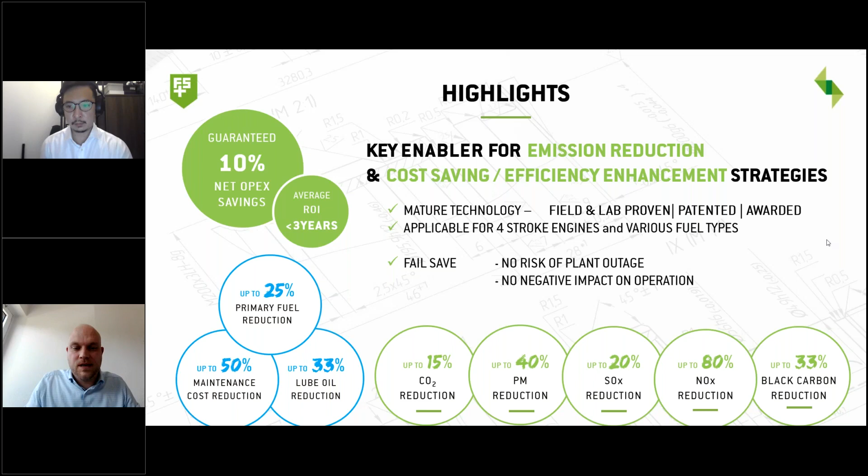So this is more or less the same numbers. I will skip this for now, leaving you more time to ask questions.

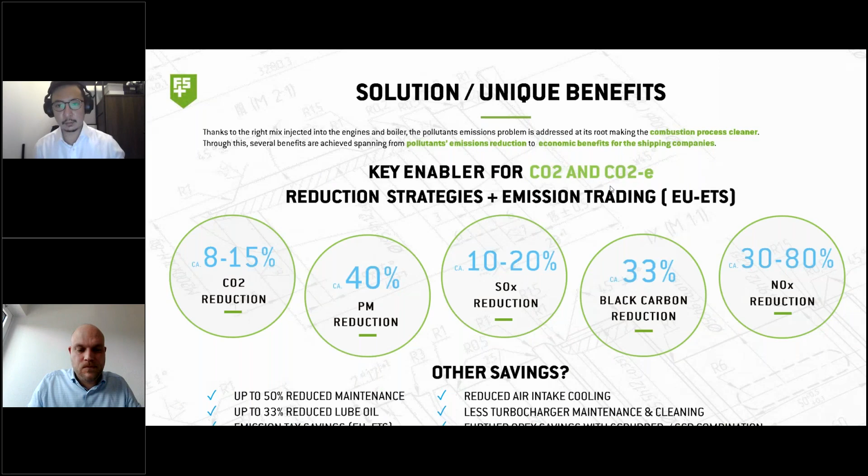Our technology, we are still a startup, but it has been tested and field proven on an installation starting 2015, for 2.5 years, meaning a real operated engine on board of a vessel, the MV Annette. It's one of the largest heavy lift crane ships in Europe. And there we achieved around 16% net OPEX savings.

Meaning that we reduce the primary fuel by a certain amount and are deducting all the operating material costs for electricity, for methanol, and even fresh water and compressed air. From the 25% gross savings we had on that auxiliary engine, we really had 16% in net cost savings, which is a huge and great outcome for an additive setup.

We also did some inspections. We wanted to assure and prove and demonstrate that the engine itself is not harmed by acidification with methanol. This has been approved by a renowned servicing company for this Volvo Penta engine where we did the installation, and was also confirmed by the classification society approving this ship, the DNV GL.

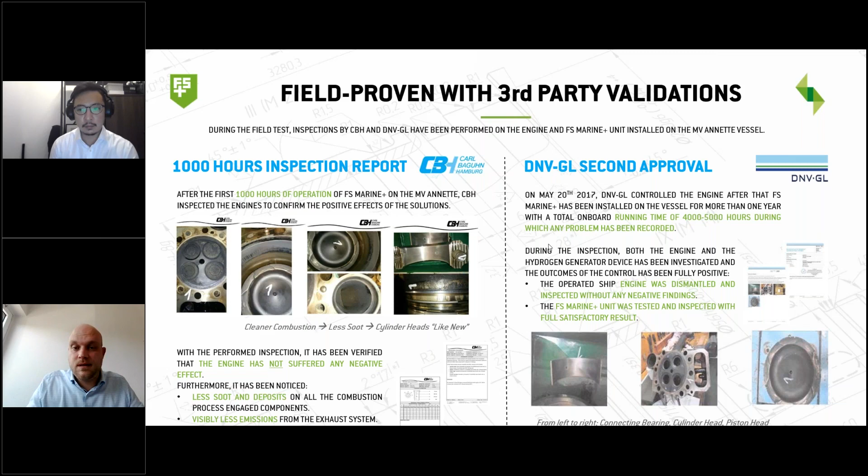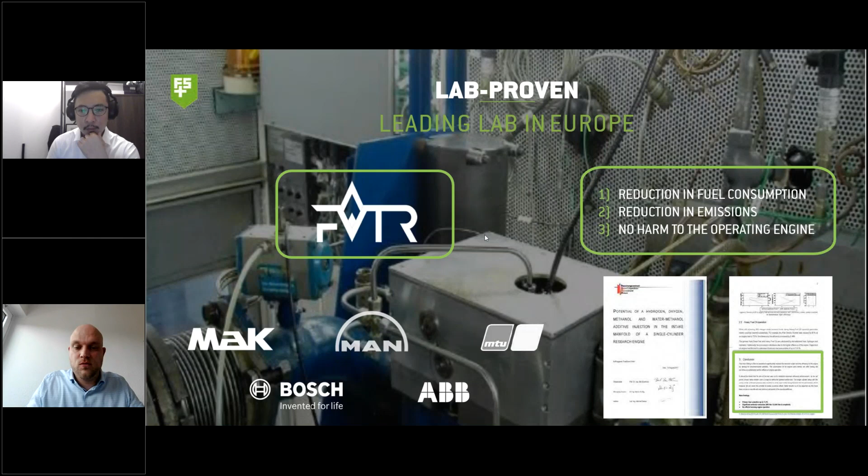Our solution has also been lab proven by one of the leading labs in Europe, where all the big engine manufacturers test their engines, hardware retrofits, new lube oils, or additives to lube oils. There we also received confirmation that our technology is not harming the engine in operation. On the contrary, it contributes to a longer engine lifetime and more harmonic operation.

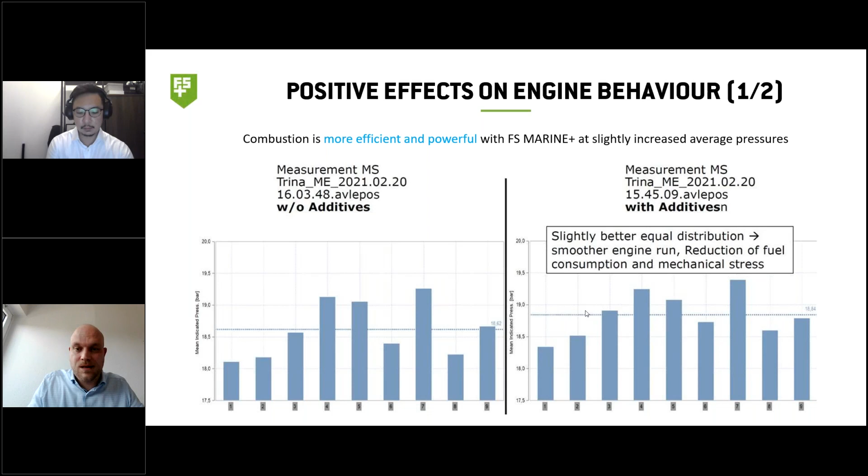This outcome has been demonstrated not by us, but by AVL, one of the largest engine builders and designers throughout the industry, at least in Europe. They stated a better equal distribution of the fuel within the cylinders, a smoother engine run, and reduction of fuel consumption and mechanical stress. That is what methanol is able to really achieve within an engine.

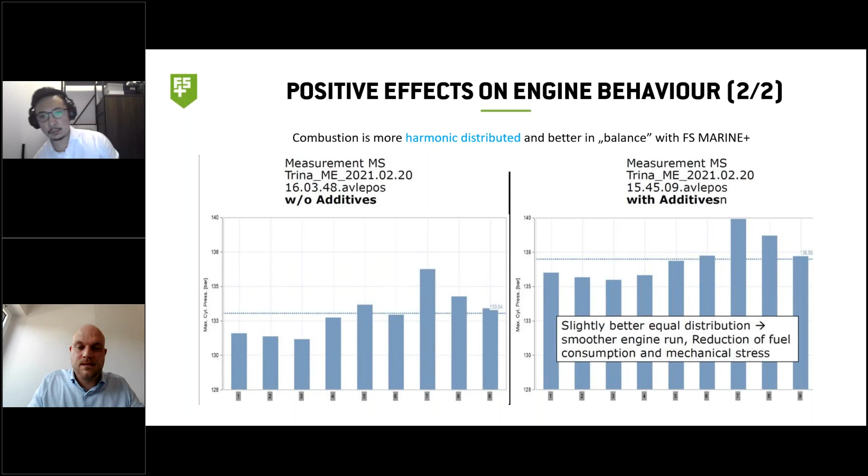This is the same chart, only for the peak pressure. We have slightly increased maximum cylinder pressures, as you can see on the right side. This is an indication of a higher efficiency of the combustion process.

Now I want to talk about what we are doing, because we are really doing current and actual installations of our technology. Our second project after the big pilot project in 2018 is a signed contract with Van Oord, which is very renowned in the maritime business. It's a specialized shipping company, and we are installing our technology on 4 engines with a total power of 16 megawatts. It's quite a large installation, and we include our own customized methanol storage tanks on board the ship, because storage is the typical issue you have when utilizing methanol on ships. We have solved that problem, and this will be the first installation of our customized design tanks on a Van Oord vessel.

And just yesterday, we received the purchase order from Seadrill, which is for sure a renowned drilling company, and that installation will be even bigger. We will install our technology on a combined 48 megawatts of engine power, meaning 6 engines with 1 methanol storage container. This will happen by the beginning of next year.